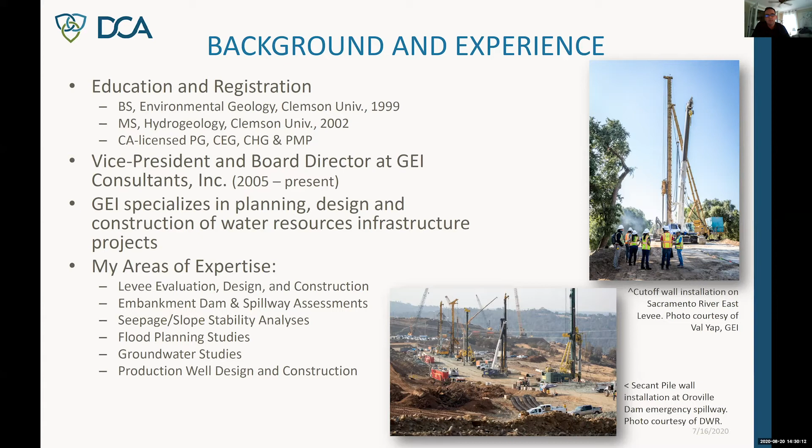Here I'm going to highlight a few significant projects that I think directly translate over to Delta Conveyance. First, starting on flood planning and evaluations, many of you are probably familiar with DWR FloodSAFE California. This was a system-wide initiative triggered right after Katrina occurred, a massive effort to take a system-wide approach to reduce flood risk for the state of California. There were several projects underneath that very broad umbrella.

Here I'm highlighting three. First, the DWR Urban and Non-Urban Levee Evaluations Program. I was involved in that project from the beginning in 2006 all the way to the end in 2015, serving as project manager for 5 separate study areas - 3 of the 12 urban study areas, and 2 additional non-urban study areas. I was also the technical lead for the statewide and regional flood management plans prepared as part of the Central Valley Flood Protection Plan in 2012, and then the 2017 update.

More recently, DWR issued a series of grant opportunities for small legacy communities that weren't included in the more detailed non-urban levee evaluations programs because they didn't meet the criteria set for that work. So there was an opportunity to pursue feasibility studies for these small communities. I was the project manager for GEI for the Rio Vista community study, and I also helped lead studies for 8 other small communities, several within the Delta and a few more in Northern California.

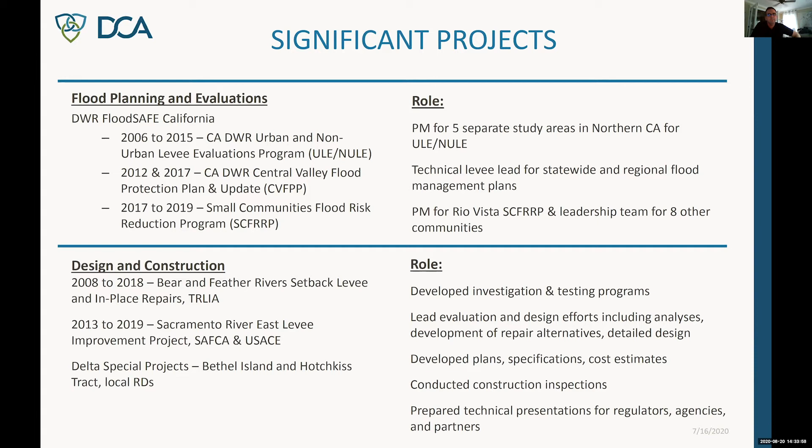So my role on Delta Conveyance is to lead the forebay and levee team. We're responsible for addressing all flood risk mitigations, establishing forebay configurations and components. And with my planning background, I've been leading a lot of the siting study efforts for major surface elements such as shafts and material depots, any of the large scale surface features.

We're responsible for the development of all the conceptual designs related to those flood risk mitigation and forebay features, and then supporting all of the outreach efforts that has been ongoing on the program. Next slide, please.

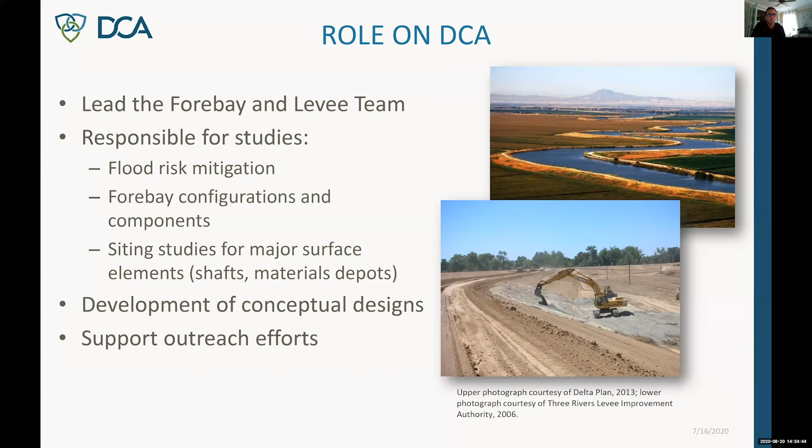Some key accomplishments I'd like to highlight: we have performed an updated levee vulnerability evaluation. What you see on the right side of the screen is a depiction of those updates, using the most recent LiDAR provided by DWR, collected at the end of 2017, beginning of 2018. I'm highlighting all the levees that we evaluated for geometric conditions, comparing their existing geometry to the range of geometric standards within the Delta - HMP, PL 84-99, and Bulletin 192-82. We've recently completed that updated analysis and have been using it in considering what flood risk mitigations might be appropriate throughout the project and for various project alternatives.

We developed the siting methodology and criteria for all the surface elements. That really started with what was the former intermediate forebay, and then has been translated to siting shafts and all sorts of different surface elements. We've been able to carry that methodology through the program and use it pretty consistently as we're looking at siting different features. We have developed design concepts for any of the levee modifications, improvements, or forebay facilities associated with the project.

A couple of system-wide studies we've really dug into: we've conducted a project-wide soil materials mass balance for the entire project, tracking all the different soil materials required at all the different locations, where they're coming from and going to. We've also tackled post-construction land reclamation - taking land that's affected by construction but not part of the permanent footprint, and determining what effort it's going to take to put that land back into productive use. Then we're summarizing all of this information and providing it to the permitting team for consideration in the environmental document. That's a summary of key accomplishments I'm proud of as part of the levee and forebay team.

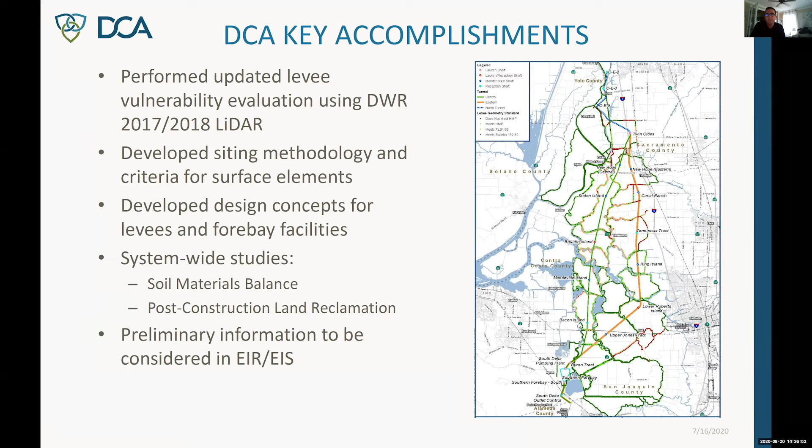Great summary, good presentation. Any questions from members of the board?

This is Director Boyce. Thank you, Graham, for a great presentation - very, very impressive resume. Is there anything technically challenging that you see potentially in this project that presents incredible difficulties, or would you characterize this more as a run-of-the-mill project or somewhere in between?

I think I'm going to go somewhere in between, Director Boyce, but right now one of the key challenges we have is the amount of available information. We're working in some cases without as much information as we'd certainly like, but given where we are in the program, we're working at concept level and feeding the environmental process. We have the ability to make use and make do with what we have, but as the project moves forward, it's obvious there's going to be a need for a lot more site-specific data. So I think that's one of the key challenges right now.

And thank you for that answer. Would you, as a follow-up, characterize the work that we're currently doing?

Graham, I got a quick question - how often will you be providing us with updates with your work? As often as you'd like. I think it's as often as I'm requested to provide it. Yeah, I was just thinking, realizing like a quarter, or how often do you think it would be, what would be useful?

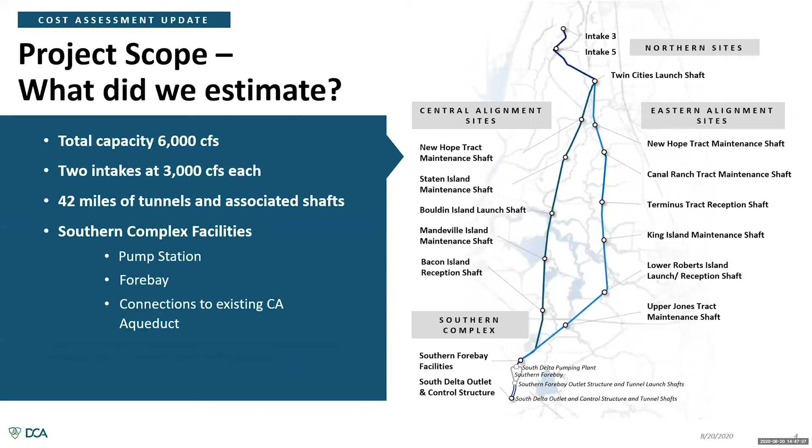The team adhered to industry standard practices to prepare this assessment, as outlined in practice guides of the Association for the Advancement of Cost Engineering. It was important to the team that we rely on industry standards where possible to help validate our work and improve the consistency throughout the design period.

Where we had good project definition and information, we developed costs at an activity level with quantity takeoffs, buildups of materials, labors, and equipment. Where that detail was lacking but items were known, we utilized allowances to include costs. The risk team developed risk mitigation strategies where appropriate, and these activities were included as line items in the estimate. Industry standard factors for items such as field management, contractor overhead, and profit were applied to the construction costs.

After all of the above items were summed, a construction contingency was applied, which was largely based on professional experience. The soft costs, which include nearly all of the non-construction items, were established based on industry standard percentages against the construction estimate.

And the environmental mitigation costs, for the purposes of this assessment, were extracted from previous work. The costs are considered a placeholder at this time until the DWR team has identified the mitigation measures necessary for Delta Conveyance.

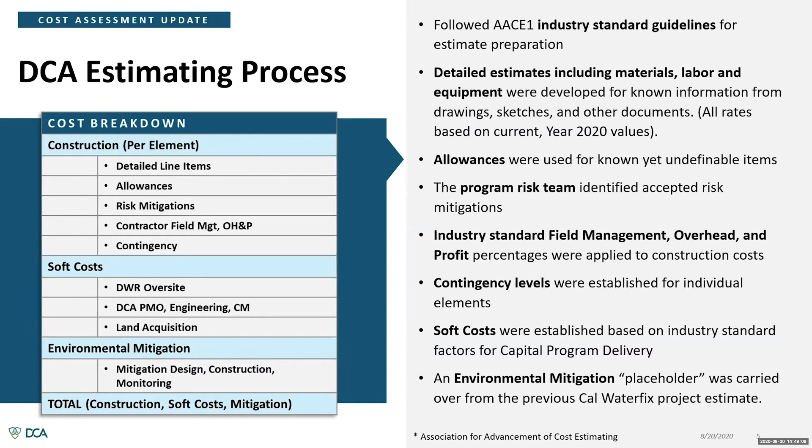Because contingency represents a relatively large portion of the construction estimate, I think it's worth spending a little bit of time defining it and how the team developed the values for this project. A common assumption is that contingency is in addition to the construction costs, or sometimes even mistaken as discretionary spending.

Contingency in this estimate is actually a component of the expected construction cost, and it represents our best guess at the cost of items that are not shown or known at this time, but based on experience are expected to result in additional costs. As a point of reference, the final drawings of the intakes that will be included in the bid documents will be in the thousands of sheets.

However, our current design is summarized today in approximately 100 sheets. For Delta Conveyance, each of the design leads worked closely with the estimators to develop an appropriate contingency level for their respective features, based on their understanding of the maturity in their work, identifying the risks that were remaining, and their own professional judgment.

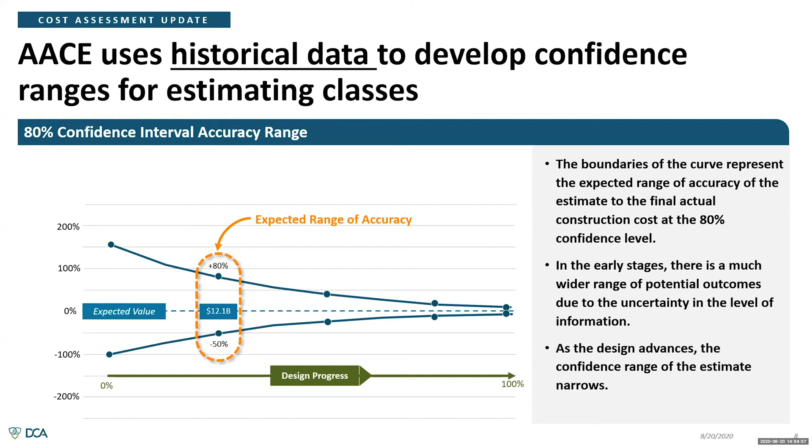It's important that we place these confidence intervals into proper context so that this estimate we've prepared is understood within this context, and equally, not taken out of context. To wrap our heads around these confidence bands, it requires us to go back to maybe our first probability class in high school or college and look at a probability curve.

So in this case, what the 80% confidence interval means is that the most likely estimate of the cost of this project is 12.1 billion. We've conducted a thorough job estimating the drawings, we've accounted for items not shown with allowances, we've mitigated our risks, and we've added an appropriate level of contingency. This thoroughness is why we believe 12.1 billion is the most likely value of construction.

Now, estimating is just that - it's an estimate that tries to predict a future outcome, and things can come up, whether it be an economic downturn that creates a highly competitive market, or tariffs that might raise the cost of steel, or new regulatory restrictions placed on work windows that add a year of delay. All of these things are possible and can have a large impact on the ultimate cost of work, so to account for these possibilities, we place confidence bands on the estimate.

But at the far ends of this confidence band shown in the figure, there is a much lower likelihood of occurrence than in the middle of the band. So while we believe with 80% confidence that the actual cost could be as low as 6 billion and upwards of close to 22 billion, there is only a 10% likelihood that the cost will be on the very low end, and equally only a 10% likelihood it would be on the higher end. Again, the most likely value is 12.1 billion. So while I can't stop someone from misinterpreting the data I'm showing here, it would be incorrect to say there is an equal chance that the cost would be 22 billion as it would be 12 billion. That statement's simply not true.

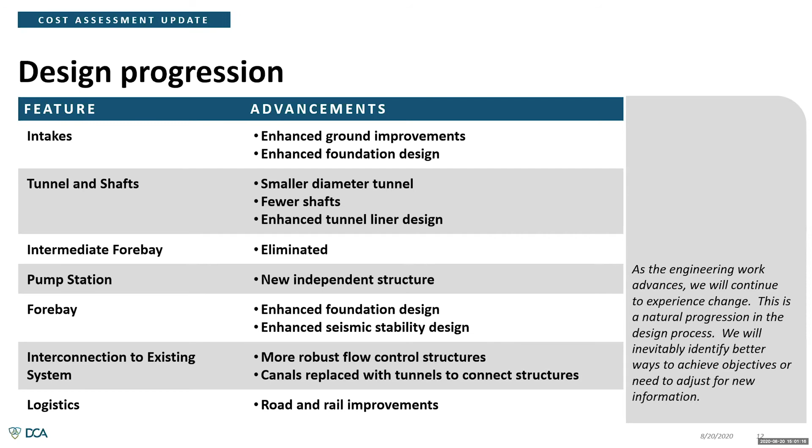So what are our next steps in preparing a final budget for the program that we will need to submit to DWR and to this board for review and approval? First, we will periodically update this board on any major changes that occur in design that have a significant impact on our assessment of costs. Some of the key things that will likely result in cost changes are completion of our first round of geotechnical exploration work.

Secondly, we will need to wait until we're through with the environmental planning process so that we more clearly understand what the final proposed configuration of the program will be. Right now we have several alternatives that we're looking at, as well as gaining insight into the final environmental mitigation measures and updating those numbers.

We'll also need to work with DWR and others to add additional soft cost items that are outside the oversight and work of the DCA and have not been included in this estimate. This might include things like the Community Benefit Fund and DWR planning costs. And finally, we'll need to adjust this undiscounted estimate to account for the time value of money by determining the expected value of each of the future contracts in the expected year of procurement.

So that concludes the presentation, and I'm glad to take any questions you may have.

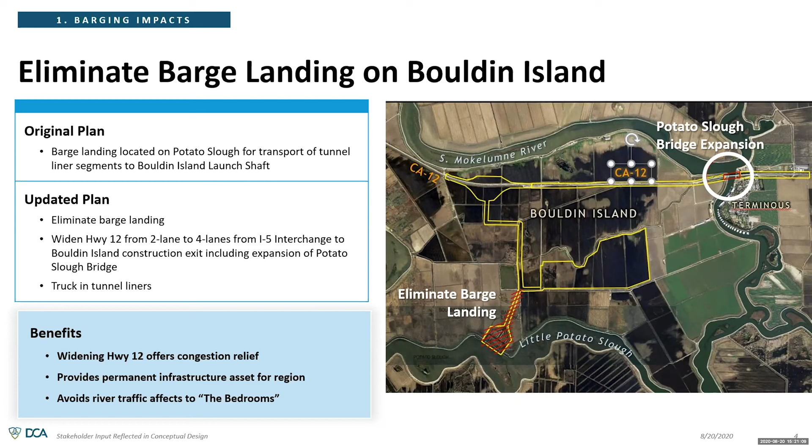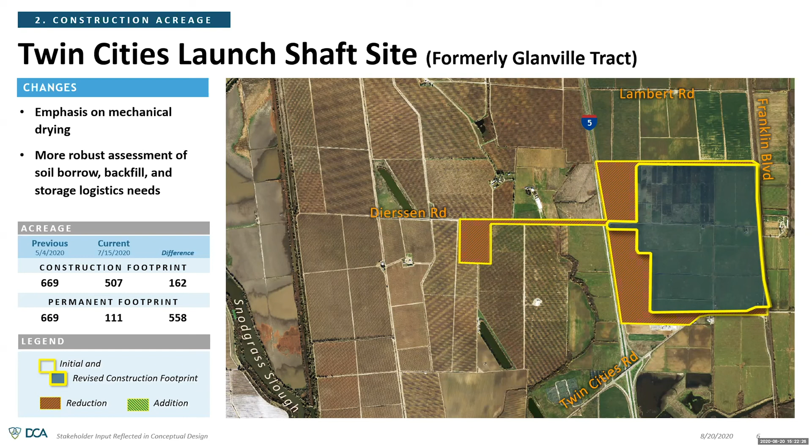That material requires drying to remove the excess moisture so that we can use it for the structural fill. We plan to take that material generated at this site down to the southern forebay for building the levee walls. This is an example where we were able to shift to a different type of technology that better serves our program, but also helps reduce the land needed for ultimate construction.

Logistics and traffic are obviously a major concern to many members of the panel. It's a quality of life factor, and we dedicated an entire session to reviewing our estimated traffic loads, with several follow-up discussions to help optimize our plan. The next few slides highlight some of our efforts to reduce these loads, which provides a dual benefit: reducing traffic loads in the Delta while also helping us move materials around more easily.

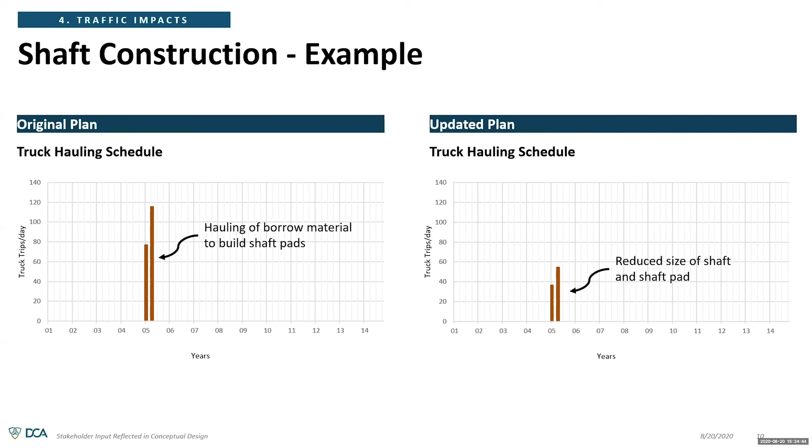We'll start with the shaft construction. One thing we noticed when we looked at the traffic histograms was significant spikes related to shifting borrow material to the site to help build the shaft pads that encircle the shaft sites. So we went back and found ways to both reduce the diameter of our shafts as well as lower the working surface height. That substantially cut the amount of borrow material needed, approximately by half, which by extension cut the traffic in half. We did that across the whole program for the shaft sites.

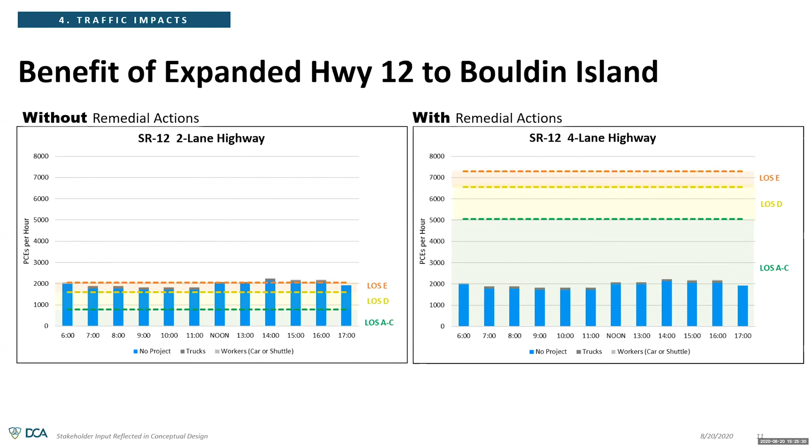We talked a little bit about the use of Highway 12 for bringing materials to the Bouldin Island site. On the left-hand side, you see the existing level of service on State Route 12, and for many times of the day, it's up in the area of level of service E, close to gridlock at some points. By adding the extra lane, Highway 12 stays within a level of service A, which benefits the Delta by avoiding traffic jams on that highway, while also ensuring we can get timely deliveries to the site.

Highway 4 was also an area with significant traffic, and it has a fairly curvy bridge over the old river. Karen Mann on the committee kindly sent us a photo of a jackknife truck trying to make that curve, which she says is a common problem in the area. One thing we did with that feedback was optimize our drive links and found we could eliminate the Victoria Island maintenance shaft along California 4, which reduces our load on Highway 4 and avoids truck traffic from the program going over that old river bridge. As a small aside, it also minimizes the amount of agricultural land we would need to acquire to build that shaft site.

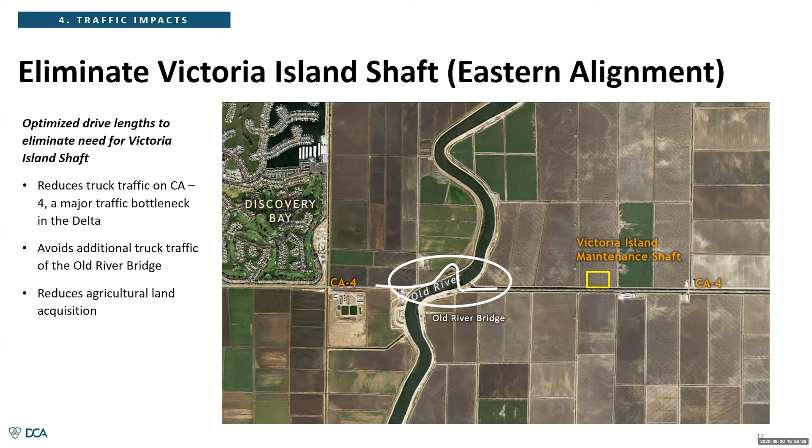One thing we noticed in the meeting where we presented these histograms is those spikes in year 3 of construction. Those were the transport of excess borrow material from construction of the hydraulic facilities on the south side of Byron Highway, transporting them along the highway and to the north side to help build the embankments.

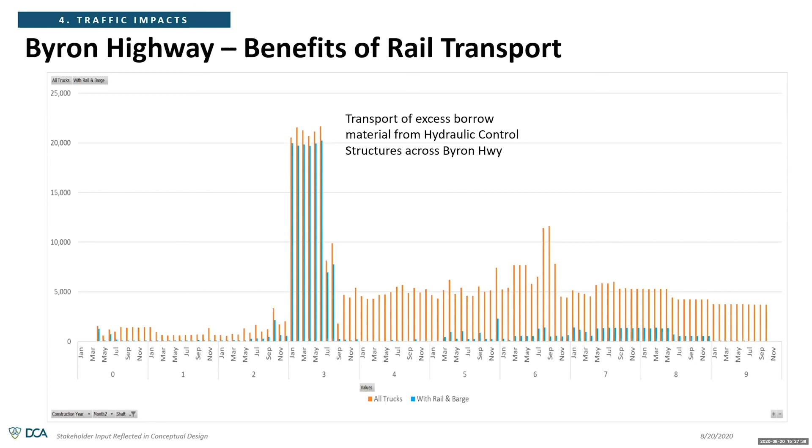This graph shows our current plan. Because of that spike, we added a bridge over the highway near Bruns Way, and were able to peel all of that traffic off of the highway and cross over with a simple bridge. The gray line is the former plan with the rail line, and the purple is now our new plan.

We were also able to reduce traffic in the outer years by shifting a lot of the riprap deliveries needed on the outside banks of the forebay from truck traffic onto rail. Significant improvements here, and there was a lot of concern on the committee around adding any additional traffic on Byron Highway.

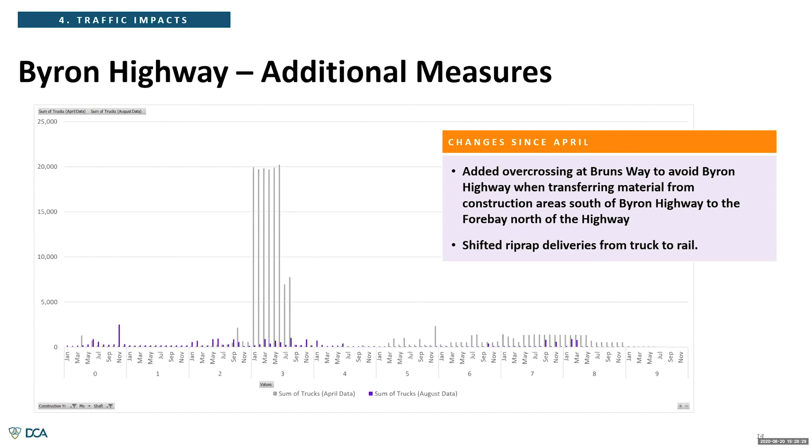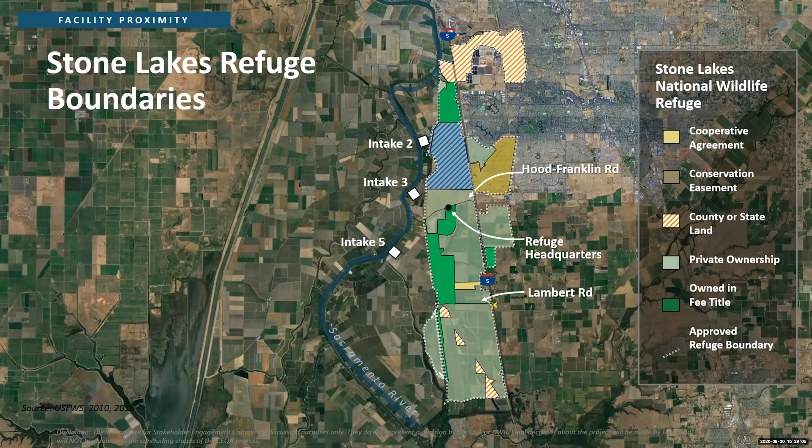So some of the things we did: first we tried to remove as many facilities outside the boundaries as was feasible. In our original scheme for the Twin Cities material site, we had planned to build the Glanville launch shaft about a mile away from our materials depot, where the rail spur would drop off materials. That would require trucking the segmental liners from the materials depot to the launch shaft, and likewise conveying the RTM out of the launch shaft back to the materials depot for drying. But after further study, we felt shifting the Glanville shaft onto the Twin Cities property provided significant operational benefit by consolidating all liner and RTM management to a single location, and also benefited the refuge by removing a major structure with significant truck traffic and conveyor noise out of its boundaries.

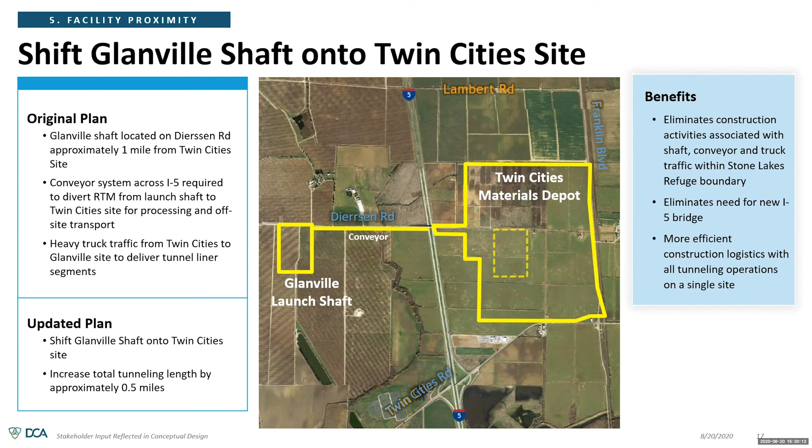We also had several iterations on the haul routes from the I-5 corridor and the Twin Cities Material Depot over to the intake sites, and narrowed in on the following plan: a park and ride at Hood Franklin, so employees to the intake sites would be transported by electric bus over to the intake sites. That relieves a significant amount of car traffic, and also shrinks the sites of the intakes by not having to provide employee parking there.

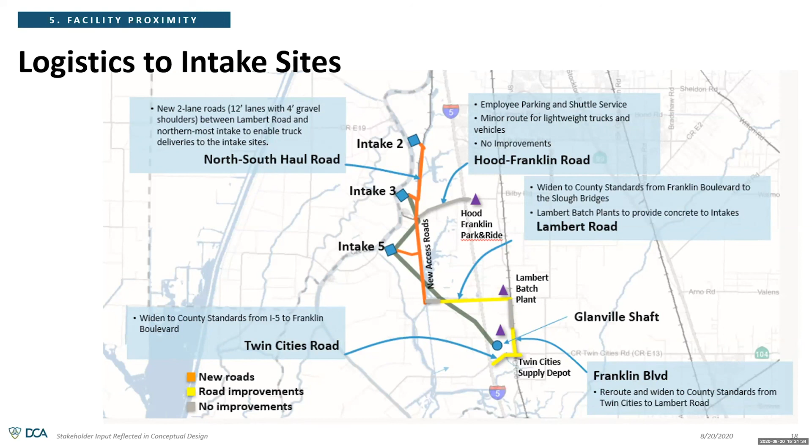We also selected Lambert Road as the sole road that crosses through the refuge boundary. There had been a number of plans distributing traffic amongst the three roads cutting from I-5 toward the intakes, but we reached consensus that using a single road would have the least impact. It serves us well: there's an exit off of I-5 right at Twin Cities that takes us to the materials depot, and then you can cut over to Lambert onto new haul roads over to the intake sites.

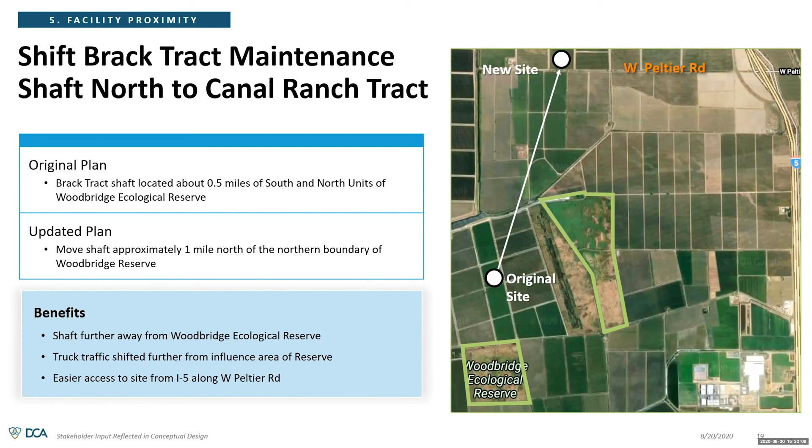The final topic I want to touch on is the safety concerns of the RTM conditioners. These conditioners are a necessary component of the tunnel drilling process; they allow the drilled material to pass easily through the cutter head and into the conveyors so the material can be transported out of the tunnel. Several members of the committee expressed concern over the application of this compound to the cutter head and its potential impact on underground residuals.

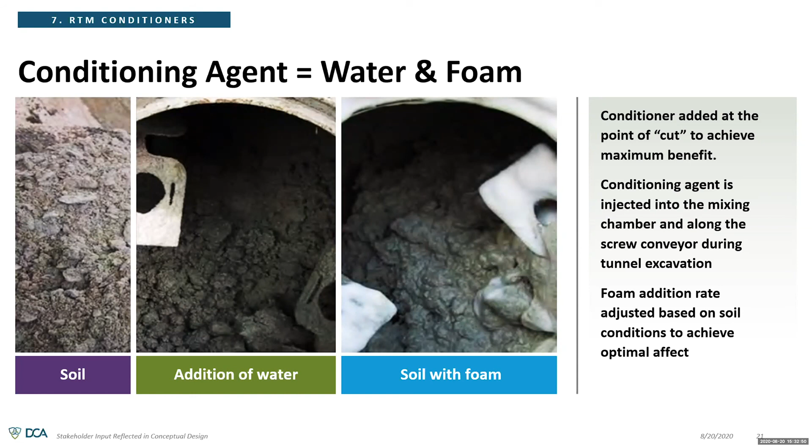So we conducted additional research on the latest compositions of these components, and we're able to commit to using a highly biodegradable material with only natural-based polymers. At the time of construction, all compounds will be tested for conformance with our requirements, and we'll also do additional testing and studies during the tunnel design phase to validate our specifications.

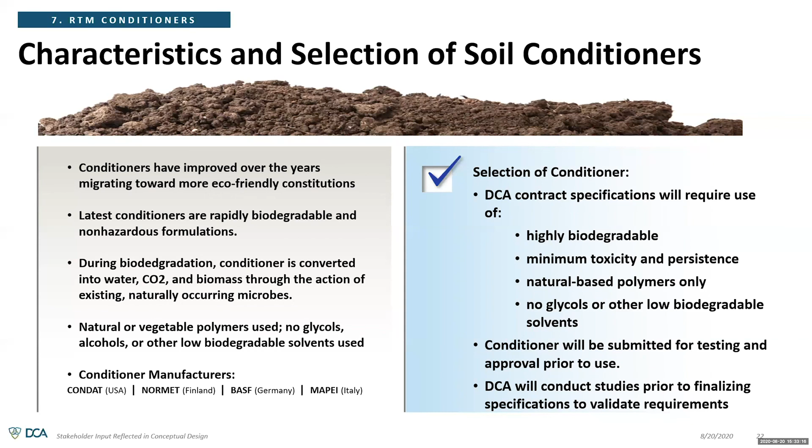So that concludes the presentation. And just one last comment, I again want to thank all of the SEC members who have contributed to this process. It's been very helpful and appreciated. So with that, I'd be glad to answer any questions of the board.

Great, thank you so much, Kathryn. Do we have any questions? I have a question, actually it's more of a comment.

It strikes me as I'm looking through this that there are several things which would improve certain infrastructure throughout various portions of the Delta. As we get to the point where DCA comes up with their CEQA analysis, it would be really useful to see a list of the things this project is contributing in terms of permanent infrastructure improvements because of the project itself. I'm very interested to see how much improvement in traffic ultimately, and improvement maybe in jobs, that type of thing. So I look forward to looking at that information as well.

Good suggestion. Any other questions?